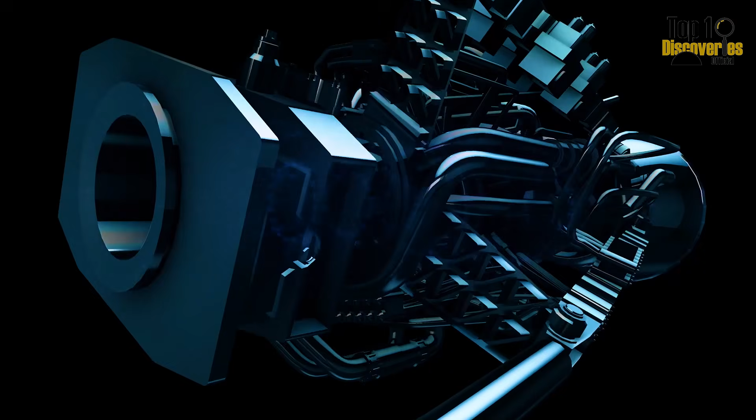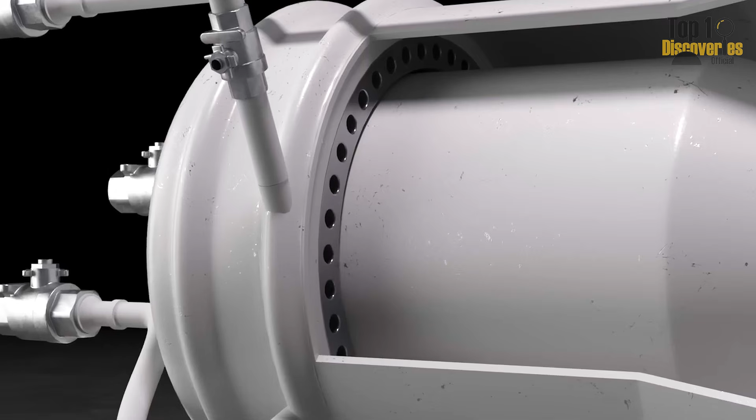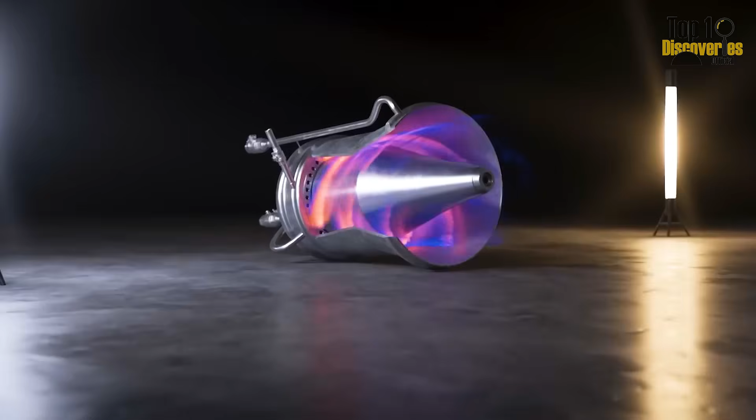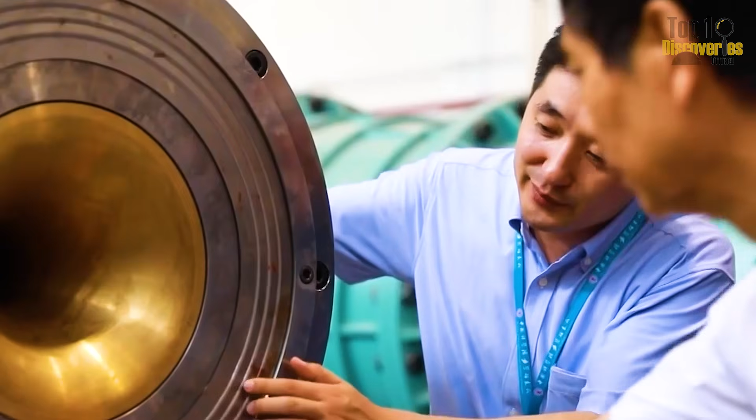What makes ODE technology so extraordinary? How does an engine like this put China ahead of other superpowers in the hypersonic race? Join Top 10 Discoveries official as we explore China's journey with ODE, a technological breakthrough that's leaving the world stunned.

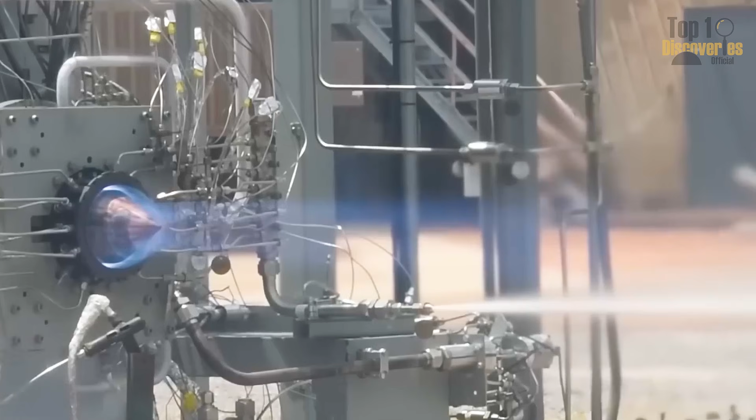The hypersonic technology race is shaping the future of aviation, and China has just made a breakthrough that demands the world's attention. In December 2020, Chinese scientists revealed the Oscillating Detonation Engine, ODE, achieving an astonishing speed of 12,276 miles per hour, equivalent to Mach 16, 16 times the speed of sound.

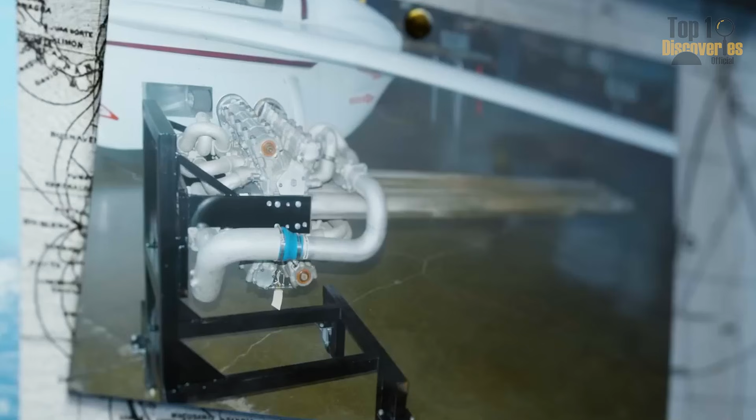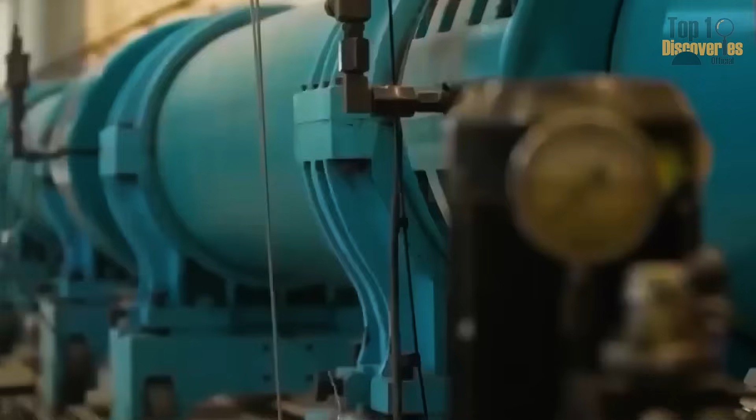While the US is still stuck at the Mach 9.6 record with the X-43A test aircraft in 2004, and Russia reaches Mach 8 to 9 with its Zircon missile, China's ODE has far surpassed these milestones, placing the country at the forefront of the hypersonic field.

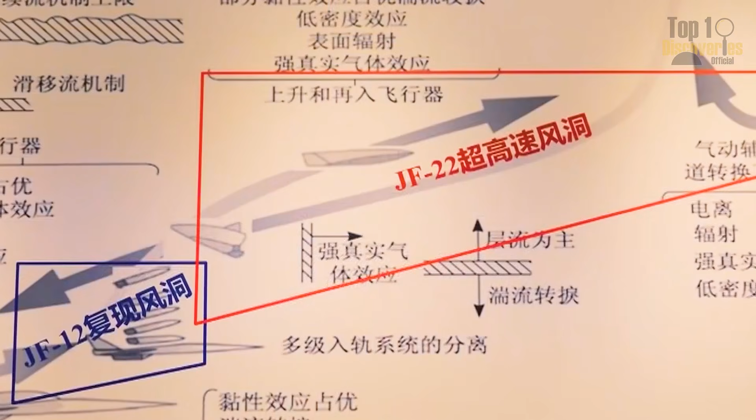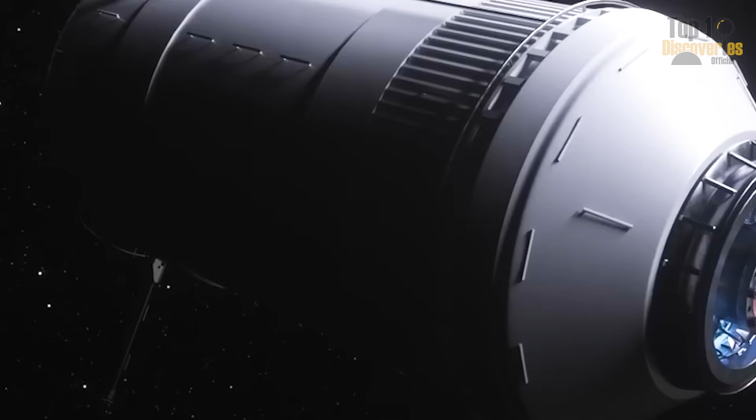The birth of ODE is closely tied to China's impressive journey of overcoming challenges. In the 2000s, US technology sanctions severed the country's access to Western advancements, from jet engines to cutting-edge aviation systems. Facing these challenges, China chose self-reliance, investing billions of dollars into domestic research. Institutions such as the Chinese Academy of Sciences, CAS, and the China Academy of Launch Vehicle Technology, CALT, became centers of innovation, gathering thousands of outstanding engineers and scientists.

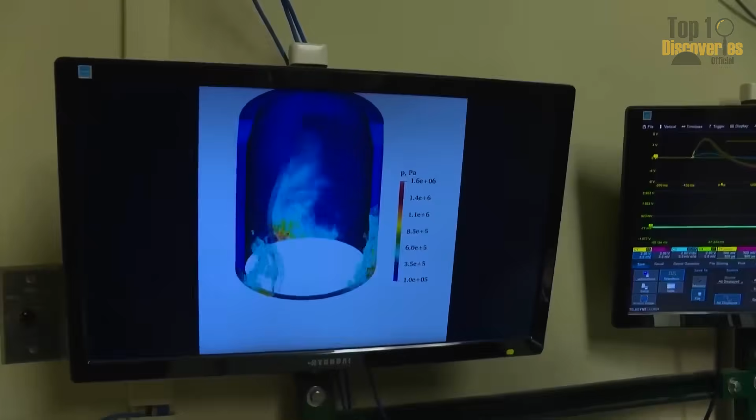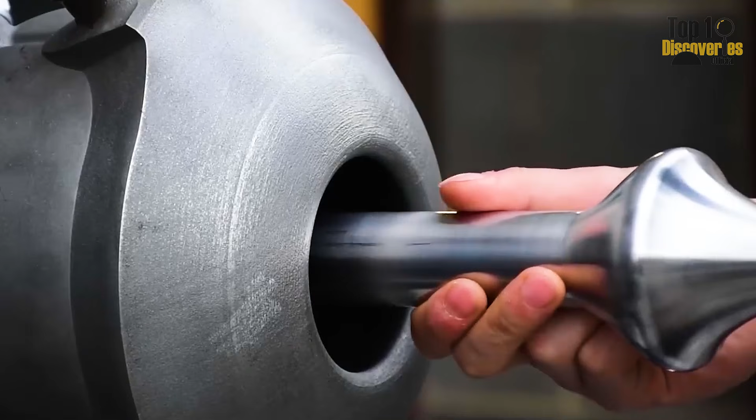ODE is the result of this investment, an engine that's not only faster, but also more efficient, using conventional aviation kerosene fuel rather than the expensive hydrogen-oxygen used in US projects. This is a revolutionary step, bringing China closer to realizing the dream of hypersonic aviation.

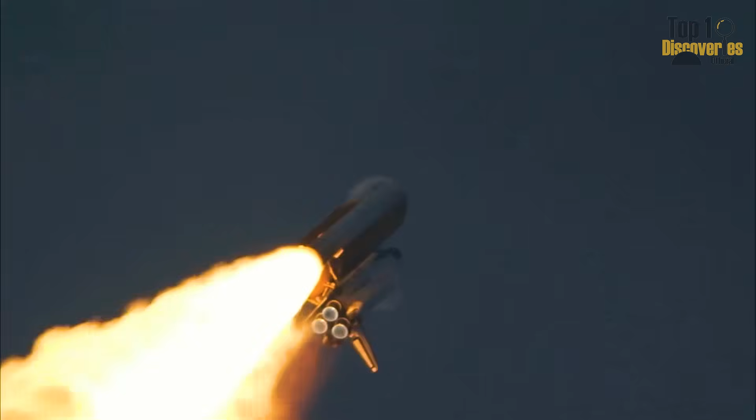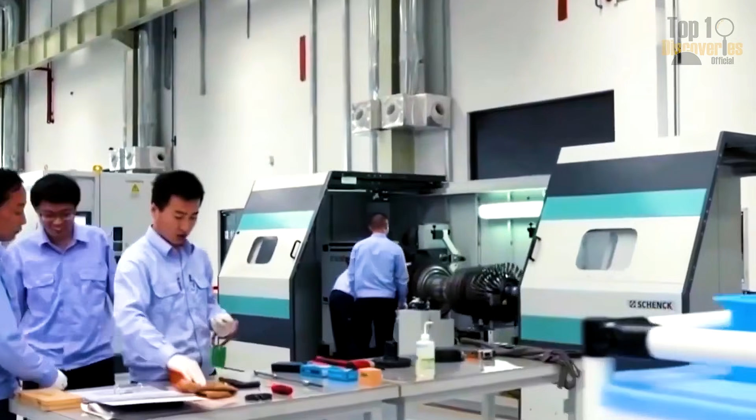ODE is not just a technical marvel, it's also a symbol of great ambition. With a speed of 12,276 miles per hour, it opens up the possibility of transforming the way we travel and explore space. This success didn't come by chance. It is the result of a long-term strategy where China turned barriers into opportunities to take the lead.

Decades ago, the country depended on engine technology from Russia and the West. Now with ODE, China has not only caught up but surpassed, setting a new standard for global aviation.

What makes China's ODE engine a technological marvel? The answer lies in its revolutionary operating mechanism, a leap forward from traditional engines. Unlike conventional jet engines or the US scramjet, which struggles with flameout at high speeds, ODE uses tilted shock waves to create self-sustaining explosions known as detonation diamonds.

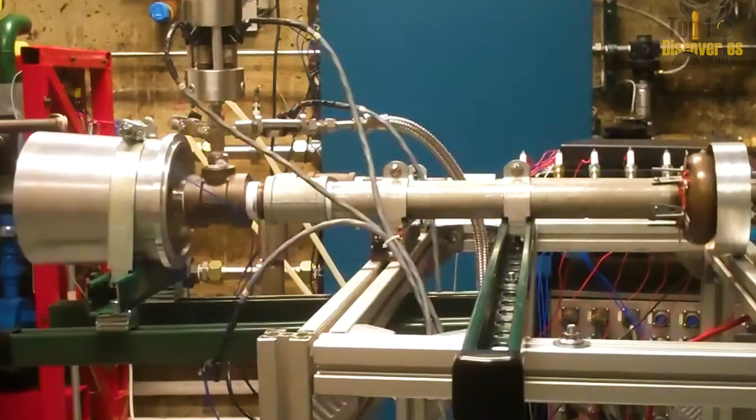These explosions occur 1,000 times faster than the combustion process in US scramjet engines, like the X-51A, which only reaches speeds of 3,806 miles per hour. With thermal efficiency up to 80%, ODE far outperforms engines like the J85-15 used in the US XB-1 aircraft, which only achieves 20 to 30% efficiency and a maximum speed of 1,675 miles per hour, nearly 10 times slower.

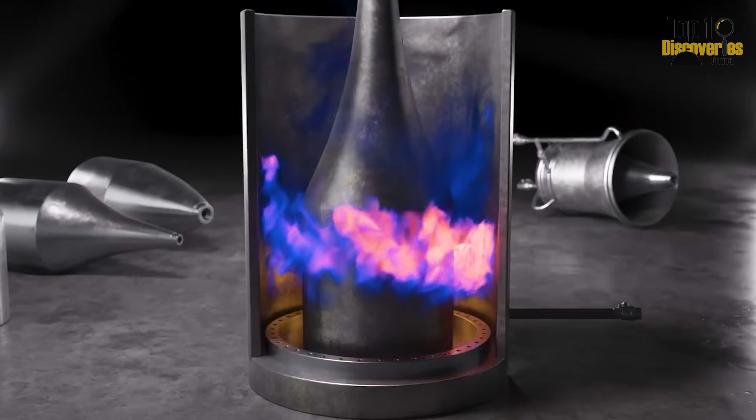A standout feature of ODE is its sophisticated combustion chamber design. A tiny bump, just 0.2 inches, is placed on the chamber walls to trigger the ultra-fast explosions, much like flipping a switch for a powerful energy reaction chain.

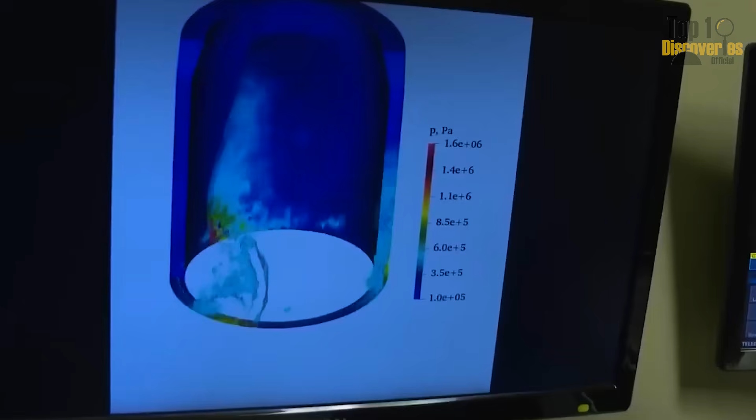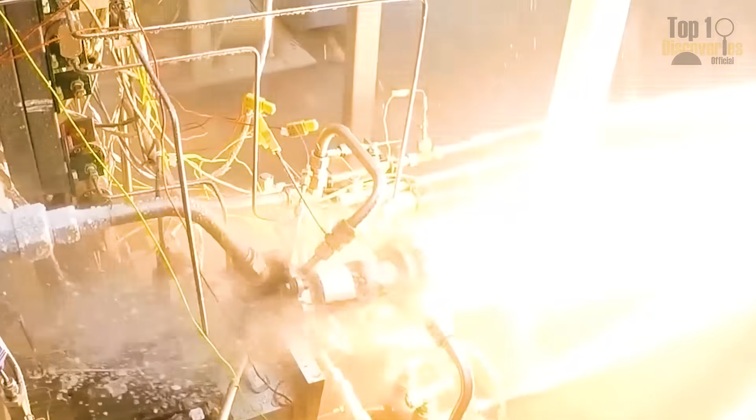The ODE combustion chamber is 85% smaller than a scramjet, significantly reducing weight and allowing the aircraft to fly farther and faster, an advantage that engineers at NASA are still striving to achieve. Imagine ODE as an F1 race car, but instead of burning gasoline, it uses ultra-fast explosions to reach speeds multiple times faster.

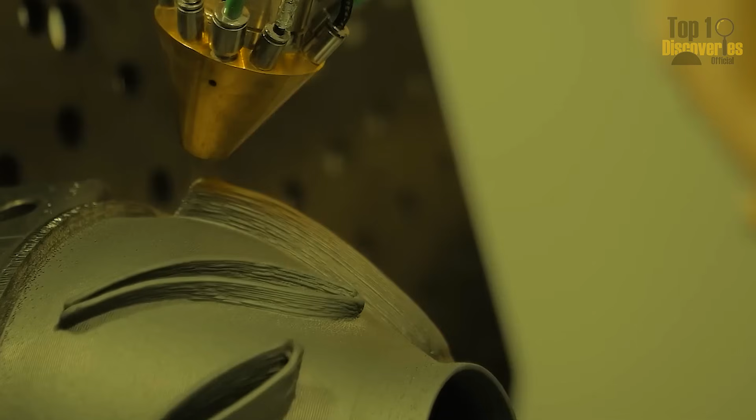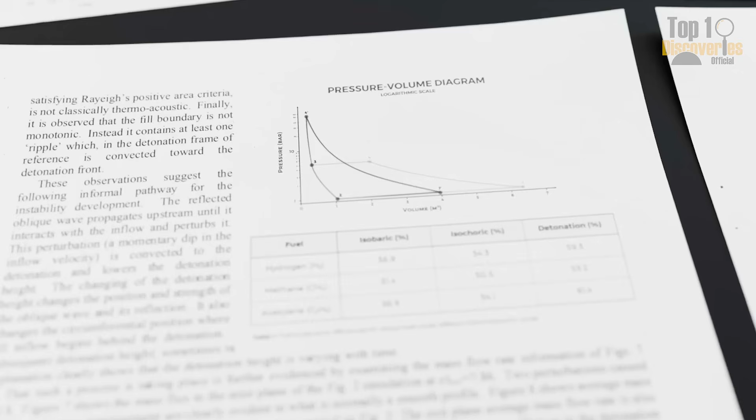The tilted detonation wave mechanism provides superior stability, addressing the flame-out issues that the US X-51A faces at Mach 5. ODE maintains stable detonations from Mach 6 to Mach 16, producing continuous and efficient thrust. This is made possible through intelligent design with optimized fuel flow from the wing-shaped struts and the precise detonation trigger bump. The result is an engine that is not only fast but also durable, ready for practical applications in the future. This technology marks a turning point.

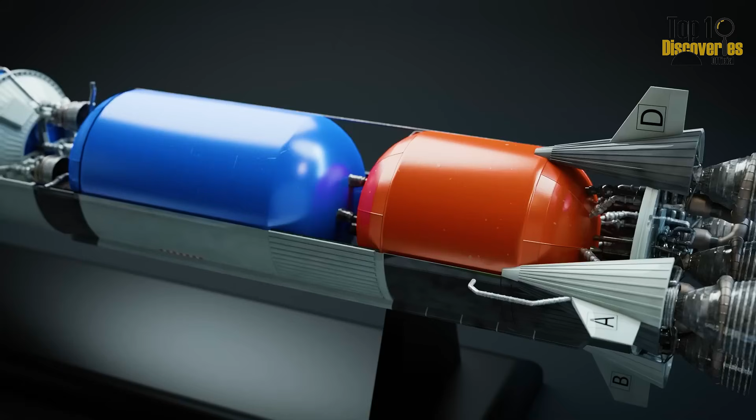While it took the US decades to achieve Mach 5 with the X-51A, China has broken through this barrier with ODE, providing unmatched performance and versatility. ODE acts like a miniature reactor, where each explosion is carefully controlled to generate maximum thrust. With this design, China is not only redefining hypersonic technology, but also proving that it is leading the technological race, bringing a future where distance is no longer a limitation.

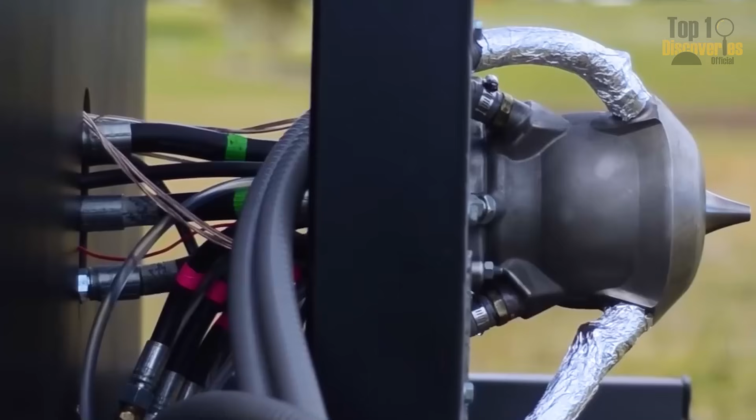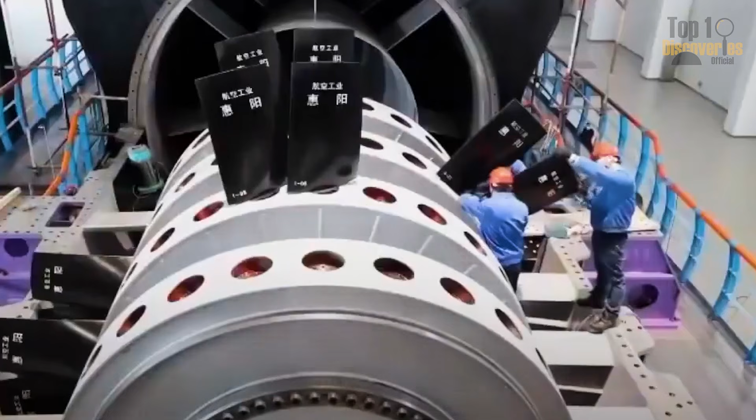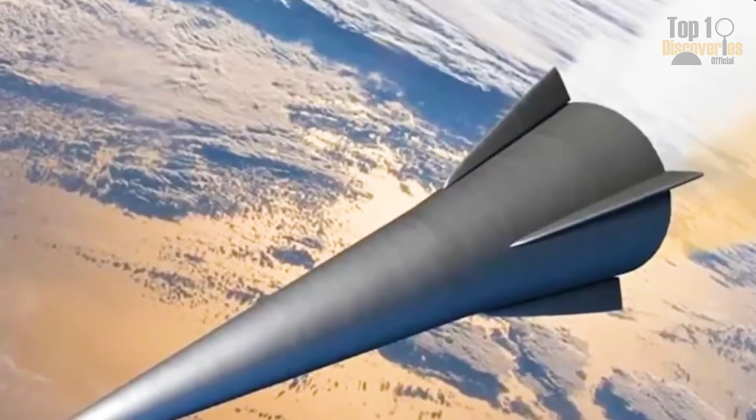It was here that the Oscillating Detonation Engine, ODE, underwent rigorous testing, delivering results that have stunned scientists globally. From the milestone of reaching Mach 9 in just 50 milliseconds in December 2023 to the record-breaking Mach 16 with stable detonation waves lasting 2 seconds in February 2025, the JF-12 has proven that China not only has the ambition, but also the infrastructure to make the hypersonic dream a reality.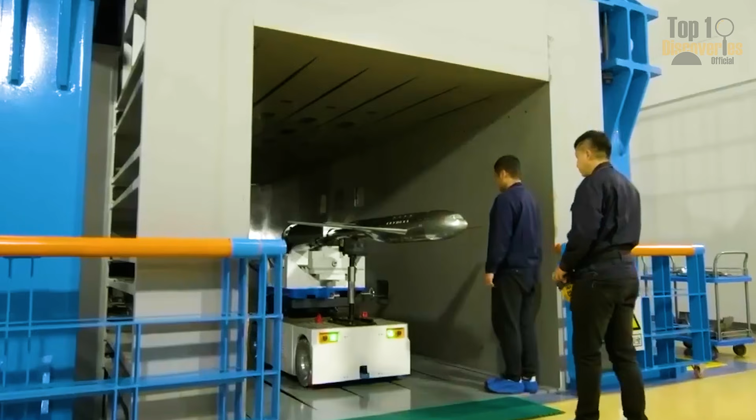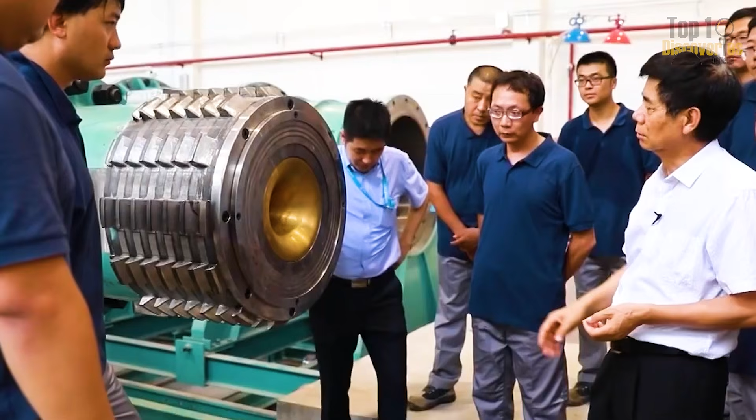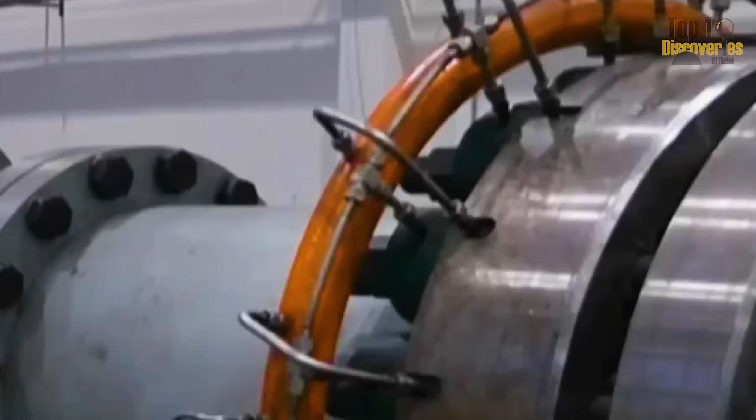The JF-12 wind tunnel is not only impressive in scale, but also in its cutting-edge technology. Equipped with advanced heat-resistant alloys and precise fuel injection systems, the JF-12 can simulate the extreme pressure and temperature conditions of hypersonic speeds. In the 2025 experiment, the ODE reached a peak pressure of 20 atmospheres at Mach 9, with detonation frequencies of up to 1,000 cycles per second, a figure that showcases the engine's ability to maintain fast, stable explosions, a feat that facilities like NASA's X-43A are yet to achieve.

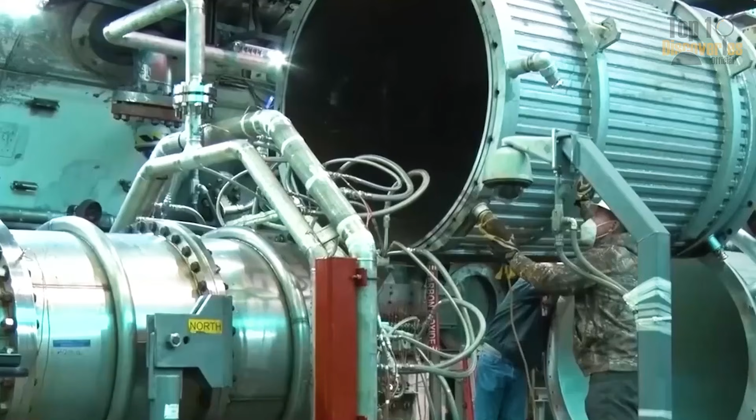The state-of-the-art sensor systems and real-time data analysis technology allow Chinese engineers to optimize the ODE design during the testing process, ensuring that every test run delivers accurate and reliable results.

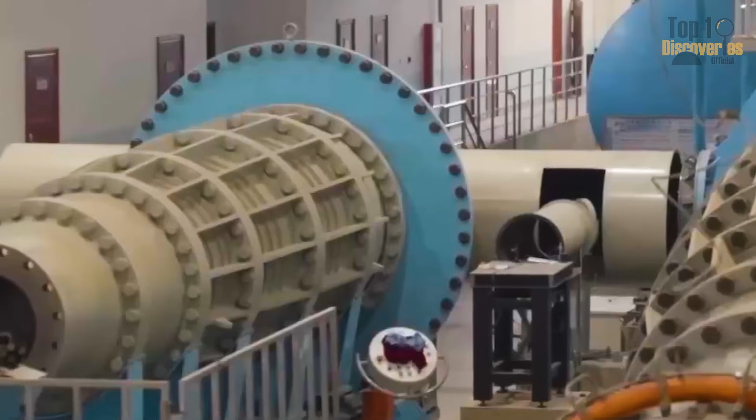What sets the JF-12 apart is China's long-term investment strategy. With an estimated aerospace budget of $50 billion from 2020 to 2025, China has turned the JF-12 into the world's leading hypersonic research center, surpassing U.S. facilities in its ability to simulate high-speed conditions over extended periods.

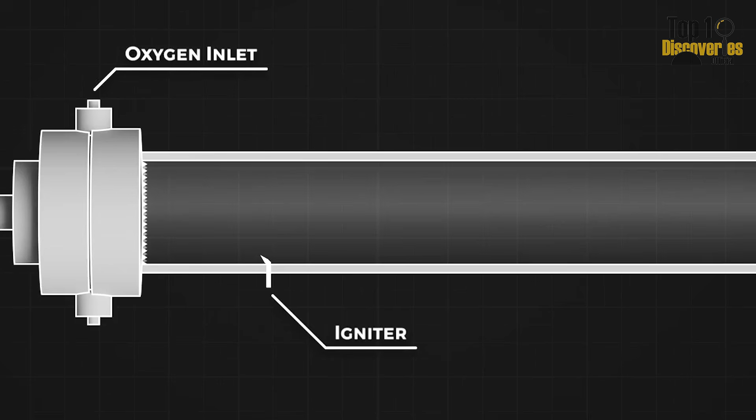While NASA has struggled with technical limitations at Mach 10, the JF-12 has helped the ODE reach Mach 16 with unprecedented stability. This wind tunnel is not only a testing ground, but also a symbol of large-scale investment, where thousands of engineers and scientists work day and night to position China at the forefront of the technological race.

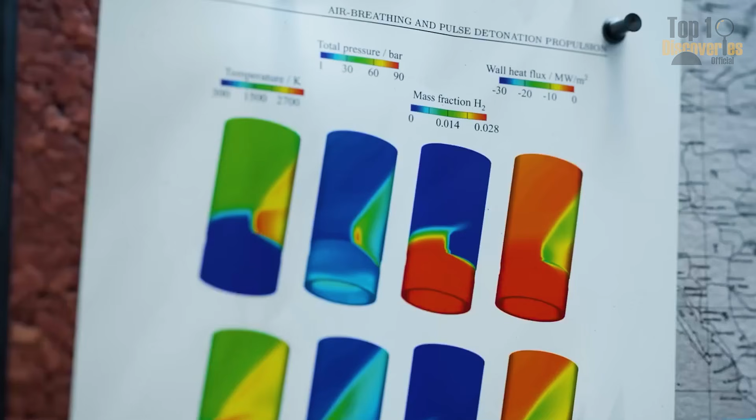The results at JF-12 represent a pivotal moment for China, bringing it closer to deploying ODE in real-world applications. From maintaining stable detonation waves to testing engine durability under extreme conditions, these experiments have confirmed that ODE is not just a concept on paper, but a technology ready to reshape the future. With this infrastructure, China is not just competing, but actively reshaping the global aviation industry.

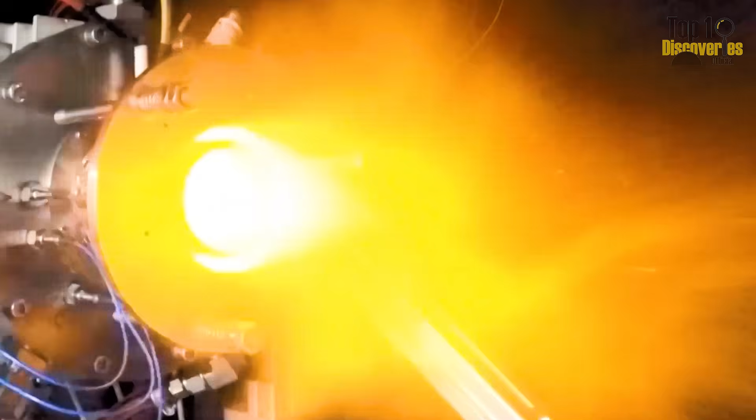China's ODE engine is not just a technological marvel, but also a key to unlocking unprecedented possibilities, from revolutionizing the way we travel to transforming space exploration. With a speed of 12,276 miles per hour, 16 times the speed of sound, ODE promises to revolutionize numerous fields, offering opportunities that current technologies, such as the Boeing 747 or Concorde engines, cannot match.

From civil aviation to space exploration and advanced technology, ODE is painting a future where distance is no longer a barrier. In the field of civil aviation, ODE could make hypersonic flights a daily reality.

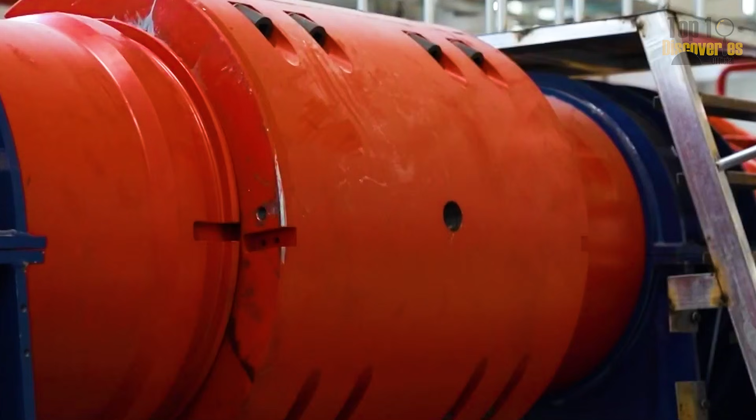Imagine this: a flight from New York to London, which currently takes 7 hours on a Boeing 747 at 575 miles per hour, could now be completed in just 45 minutes. Compared to the Concorde, which reached Mach 2 but was retired in 2003, ODE is 8 times faster and uses conventional kerosene fuel, significantly reducing operating costs. With ticket prices estimated at around $10,000 per flight, ODE opens the door to affordable hypersonic airlines.

You could fly from Los Angeles to Shanghai in just 32 minutes, as fast as watching a short episode. This is the progress that U.S. projects like Boom Supersonic are still striving to achieve.

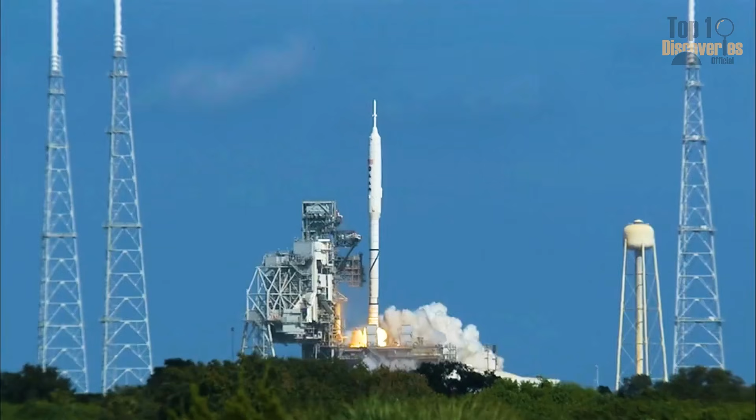In the field of space exploration, ODE offers the potential to change how we explore the universe. With a speed of Mach 16, this engine could support reusable spacecraft, reducing the cost of satellite launches from $10 million to just $2 million per launch.

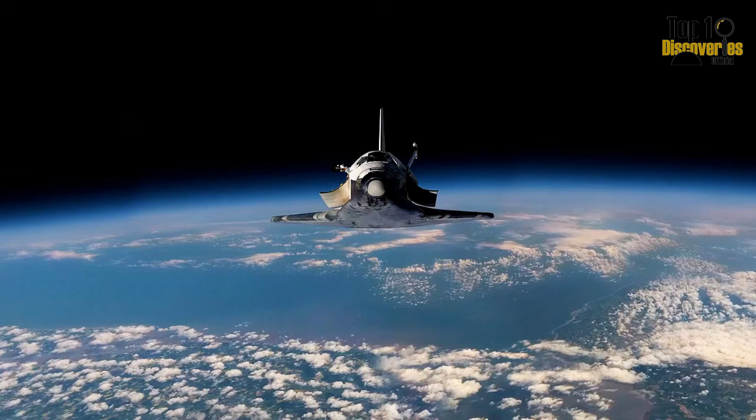Compared to U.S. expendable rocket systems like SpaceX's Falcon 9, ODE offers superior efficiency, paving the way for affordable space tourism and missions that explore further than ever before. China is turning into reality a future where we can book space tourism tickets at reasonable prices, or companies can deploy global satellite networks in just a few hours.

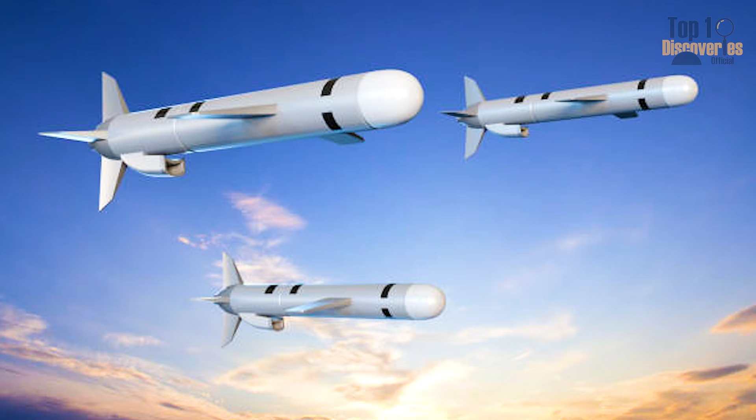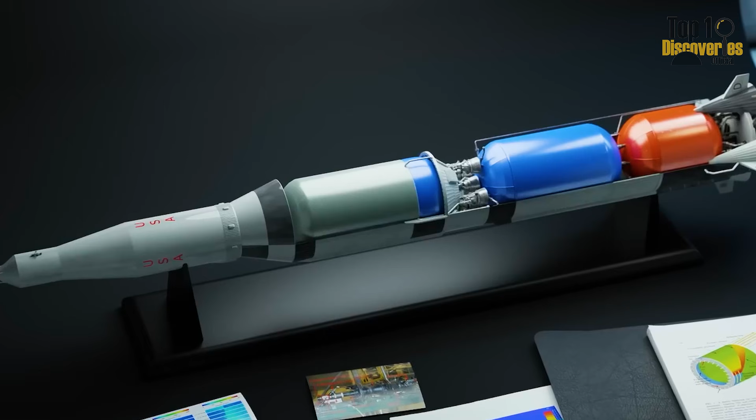These applications not only provide commercial benefits, but also support missions such as rescue operations or disaster monitoring, where speed is a matter of life and death. ODE is a testament to China's vision in shaping the future. From super-fast intercontinental flights to affordable space missions and advanced technologies, this engine is opening a new era. With these applications, China is not just dreaming, but actively building that future today.

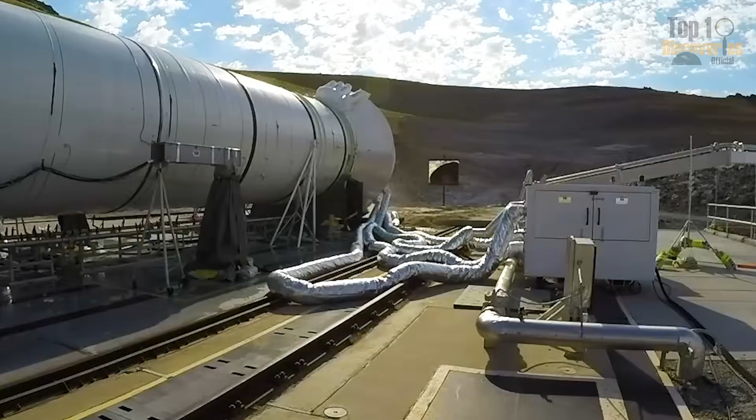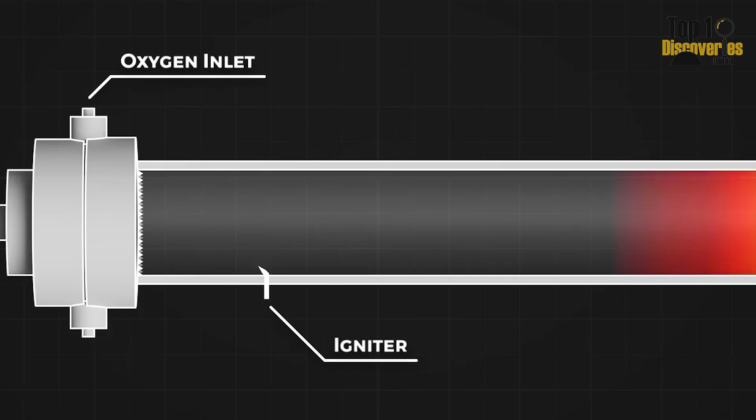To create a breakthrough like the ODE engine, China has made a significant investment in domestic research, building a powerful technology ecosystem that has propelled the nation from a follower to the leader in the hypersonic race. With an estimated $50 billion aviation research budget from 2020 to 2025, China has outpaced the U.S.

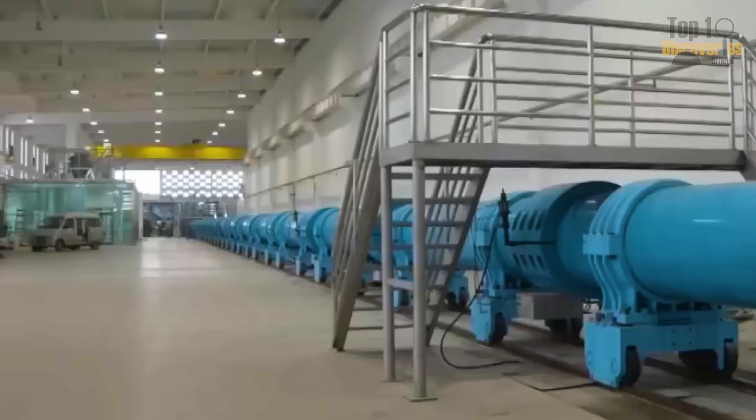The U.S. allocated about $30 billion to the same field from 2015 to 2025. This massive funding is not just a number, it stands as a testament to China's determination to shape the future of aviation, with ODE symbolizing their relentless innovation.

At the heart of this strategy is the close collaboration between leading research organizations such as the Chinese Academy of Sciences, CAS, the China Academy of Launch Vehicle Technology, CALT, and Northwestern Polytechnical University. More than 10,000 engineers and scientists working at these facilities have created an innovation ecosystem where ideas are turned into reality at an astonishing pace.

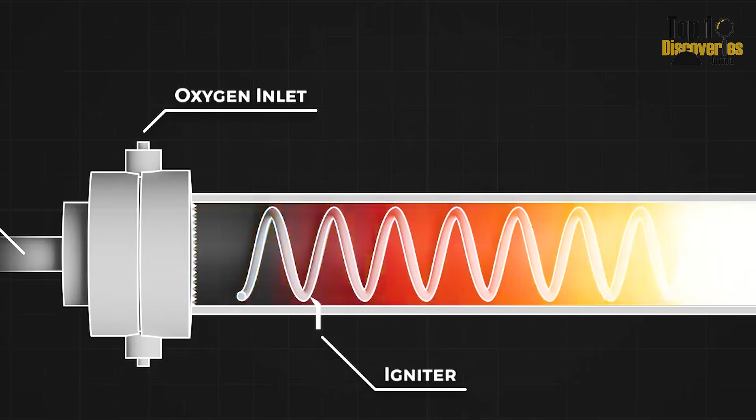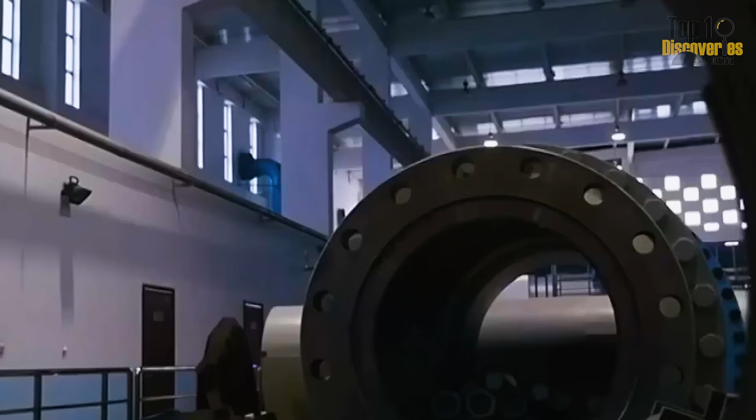From 2020 to 2024, China registered over 5,000 patents related to hypersonic technology, double the number of patents filed by the U.S. in the same period. Compared to projects like the US X-51A, which faced delays due to technical issues and costs, China has accelerated its progress thanks to its focused resource allocation and strategic vision.

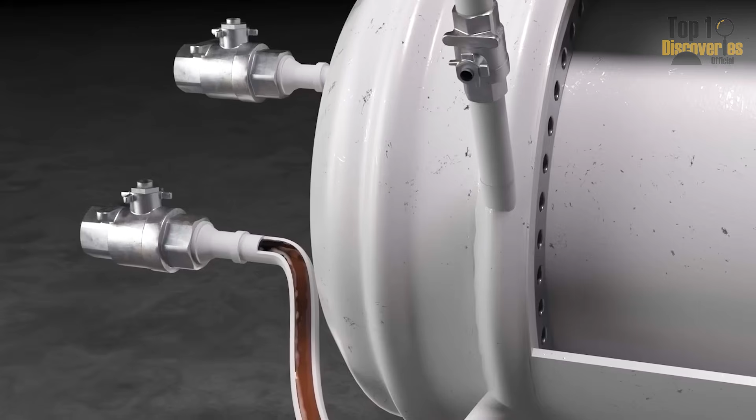A key factor in China's success is the application of artificial intelligence, AI, in research. AI is used to simulate thousands of design scenarios for ODE, from optimizing fuel flow to improving engine structure, helping reduce the development time from several years to just a few months.

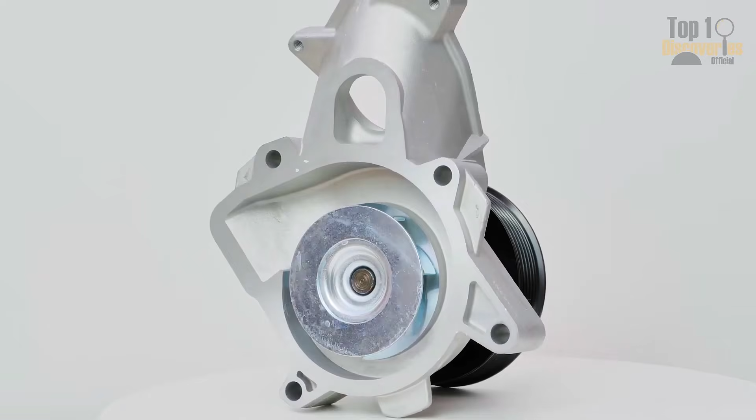While the U.S. still relies on lengthy and costly testing processes, China has built a domestic research network that allows it to control the entire process from ideation to production. This not only speeds up development, but also allows ODE to use conventional kerosene fuel rather than the expensive hydrogen-oxygen fuel used in NASA's projects, giving it a significant economic advantage.

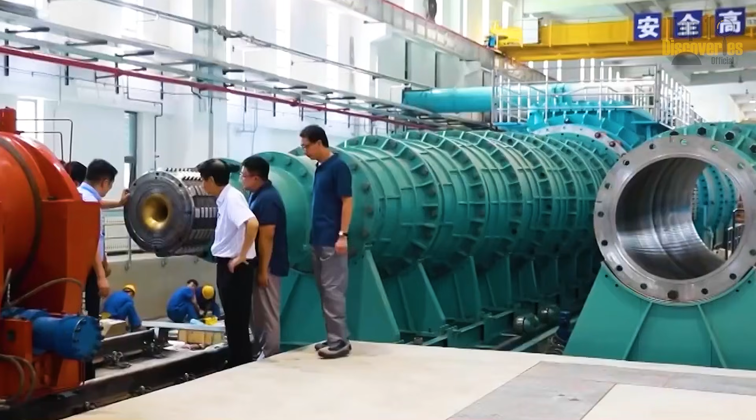China's strategy also lies in its ability to learn and adapt. In the 1980s, the country was dependent on Russian engines and Western technology. However, through continuous investment, China has built a self-reliant research system, from modern laboratories to a well-trained engineering workforce. This system not only produced ODE, but also laid the foundation for future advancements in hypersonic technology.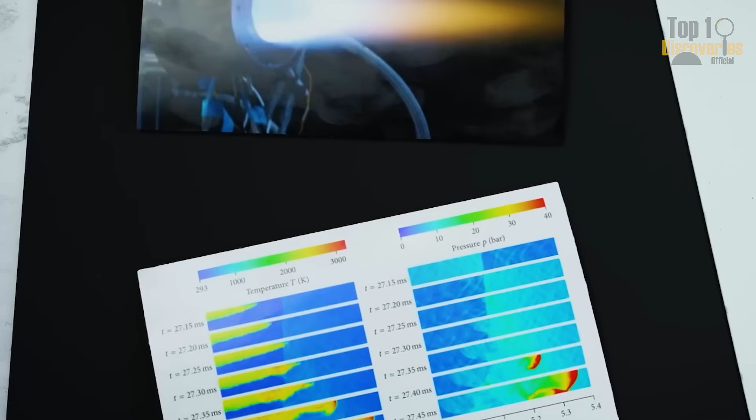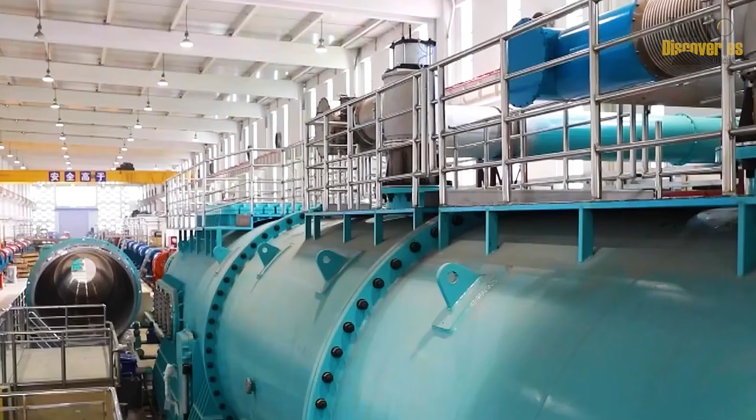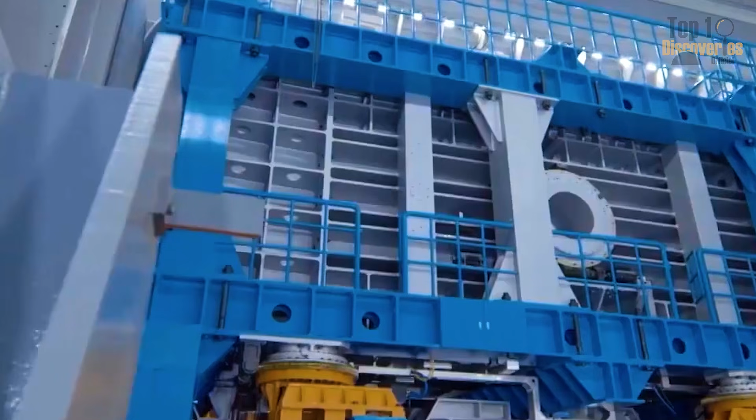Unlike the US, where defense contractors like Lockheed Martin often work independently, China has created a model of close collaboration between academia, government, and business, ensuring that every step is aimed toward a common goal. The success of ODE is proof of the power of this investment strategy. From a nation once limited by technological barriers, China is now setting new standards for the global aviation industry. We can witness an innovation ecosystem where thousands of brilliant minds work together to turn dreams into reality. This is the formula that has propelled China to the forefront of the hypersonic technology race.

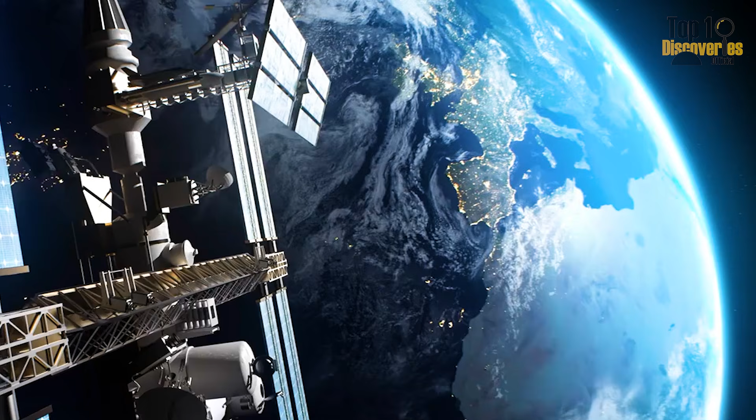The ODE engine marks a technological leap that is opening up new possibilities for a new era in aviation and space exploration. With the goal of launching commercial hypersonic flights by 2030, China is painting a future where the distance between continents becomes insignificant and space is no longer a distant dream. China aims to have commercial hypersonic aircraft in operation before 2030, with prototypes expected to take their first test flights as early as the end of 2025.

These aircraft will not only be faster, but also more efficient, offering an unprecedented travel experience. Unlike US projects like Boom Supersonic, which are still struggling with slower engines, China is betting on ODE to lead the way, turning global air routes into faster journeys and connecting the world more tightly than ever before.

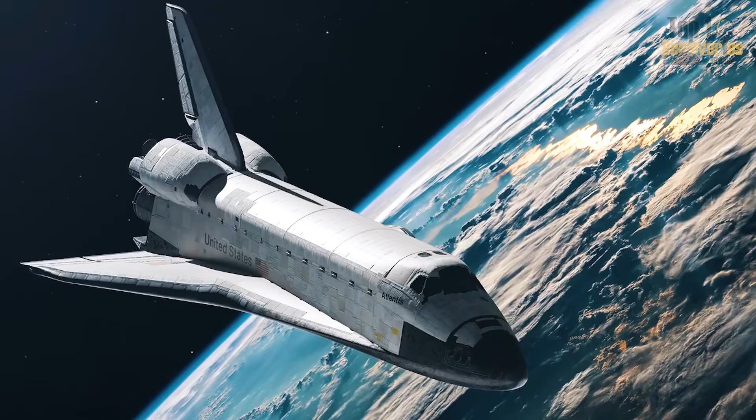Beyond aviation, ODE opens the door to a new space age. China is aiming to make space tourism an experience accessible to everyone, with reusable spacecraft supported by ODE. In the future, you could book a ticket to view Earth from the edge of space, or companies could deploy global satellite networks at far lower costs than today.

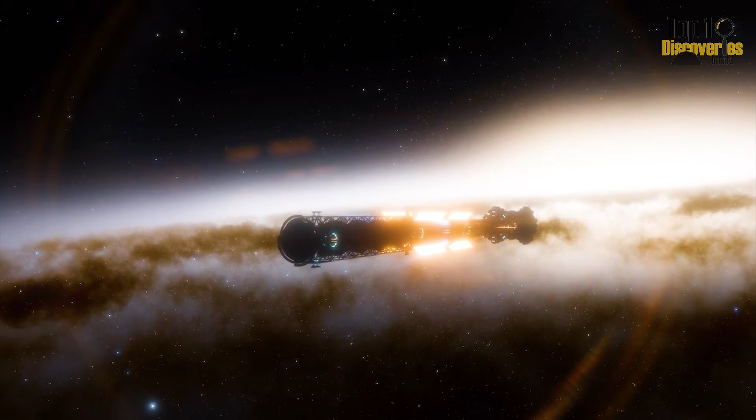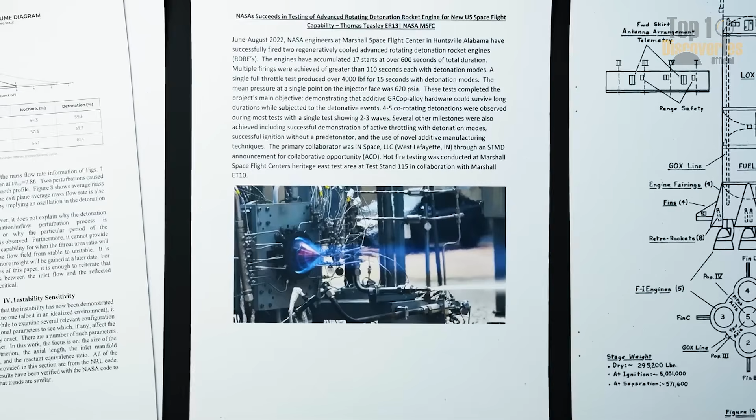Compared to traditional US rocket systems, which are expensive and complex, ODE offers simplicity and efficiency, promising to bring space closer to everyone. This is the vision China is pursuing, a world where space is no longer the playground of billionaires. To achieve these goals, China faces technical challenges, such as developing materials that can withstand extreme conditions and optimizing engine performance. However, with significant investment in artificial intelligence and advanced materials, China is gradually overcoming these barriers, making ODE a feasible solution for the future.

Leading laboratories at Northwestern Polytechnical University and other research organizations are working tirelessly to ensure that ODE is not just an idea, but a reality that can be implemented in the next decade. China's vision goes beyond just technology. It's about reshaping how the world operates.

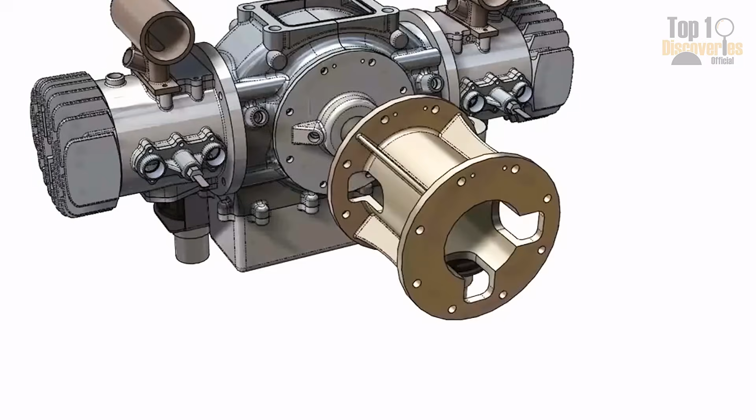With ODE, China is positioning itself to lead the hypersonic aviation industry, challenging the dominance of powers like the US and Europe. While other nations are still developing slower technologies, China is already ahead, building a future where cities around the world are as closely connected as neighboring districts, and space becomes the next frontier for humanity.

ODE is not just an engine, it's a symbol of continuous innovation, a nation daring to dream big and taking action to turn that dream into reality. The ODE engine is a testament to China's innovation power, from advanced laboratories to record-breaking experiments, paving the way for a new era of hypersonic aviation.

It's not just a story of superior technology, but a vision of a world where the distance between continents disappears and space becomes humanity's next destination. With ODE, China is not only competing, but leading the way, setting new standards for global aviation. From smart investment strategies to significant technical advancements, this journey demonstrates a nation daring to think big and act decisively.